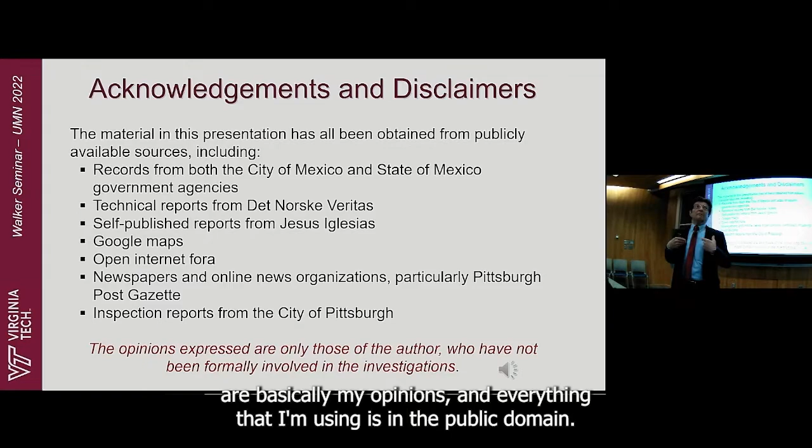Anyway, I'm going to talk a little bit about a topic of my interest, not really research in that sense, but a topic that I find very apropos. Before I start, I must put this disclaimer up there because everything you're going to hear are basically my opinions, and everything I'm using is in the public domain. But all the things I'm going to say are my responsibility.

So just to give you, for those of you who don't know me, I was a beautiful baby. And I've had the opportunity of moving around a lot and living in different places, and I think that's been terrific.

A recent shot of my family, my son and my daughter and my wife, and my son is married, and I have a beautiful daughter-in-law and a great granddaughter, and hopefully I'll be a grandfather again for a second time very soon. So things are changing for me.

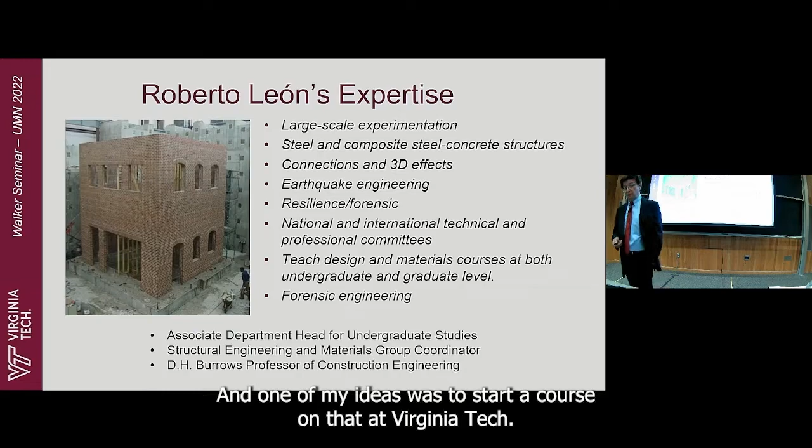Over my career, as Kathy says, I've done a lot of things, but the last thing that I got pretty interested in is forensic engineering. That's when I went to Virginia Tech, and one of my ideas was to start a course on that at Virginia Tech. And the origins of that are actually here in Minneapolis.

My first foray into forensic engineering was with the collapse of the formwork for the arch bridge that was replacing the old one on Hennepin Avenue. This was a pretty interesting situation because it was a failure of formwork, and I actually didn't participate in the investigation per se. If you're interested, there is a PCA report that's now online about the whole investigation.

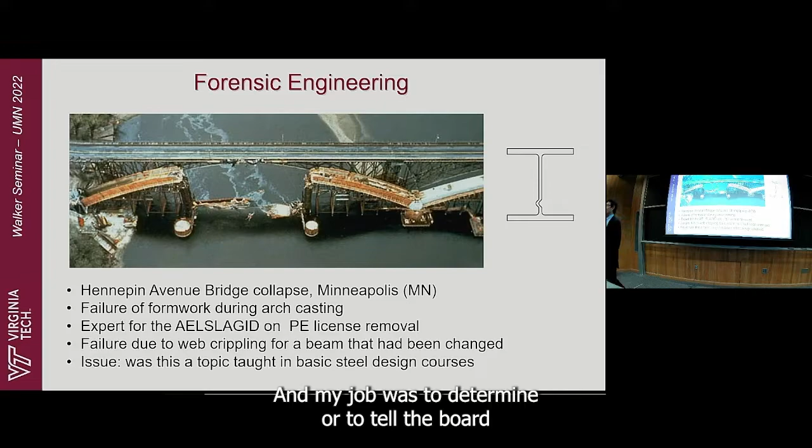I served as the expert for the Board of Licensing for engineers here to determine whether the license of the engineers for that part of the project should have been taken away. And the whole thing hinged on web crippling. My job was to determine, or to tell the board, whether web crippling was something that got taught and was important enough that the engineers should have known about it.

And I was a young, stupid assistant professor, and I said yes. And they actually took away the licenses for the engineers as a result of that. I think with my experience today, I would have handled that a little bit differently. But I've had lots of other experiences.

I was not, for example, involved directly on the I-35W bridge, but I was very involved with a colleague at Georgia Tech, Don White, in looking at both the analysis and the testing of full-scale truss connections. This is not a half-scale version of the one that collapsed, it's as close as you can get.

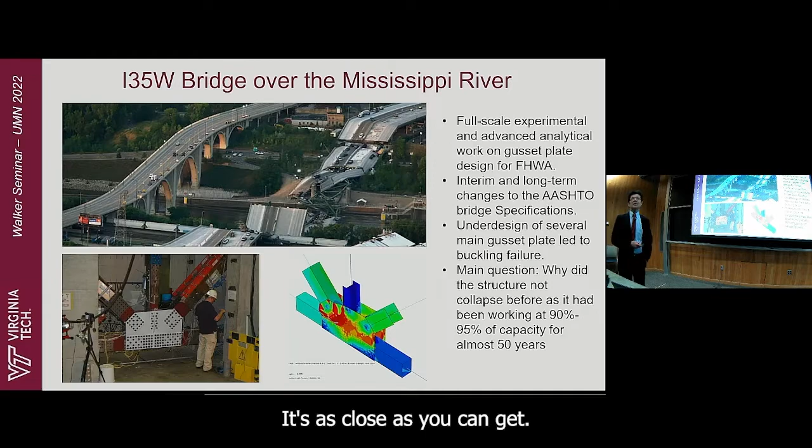I've also had the opportunity of doing a lot of research on seismic design and post-earthquake investigations. I happened to be in Christchurch, New Zealand, when the earthquake occurred back in 2011, and I was there for 3 months afterwards. So I saw how, in the longer term, a city reacts to a disaster like that.

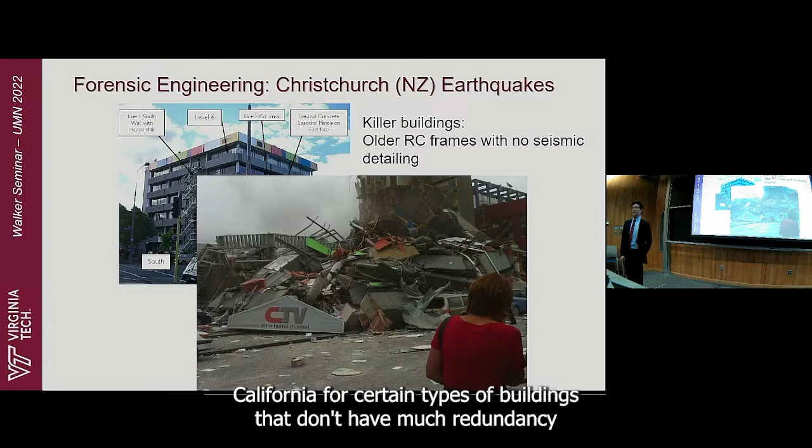I had been to other situations like that, but you usually go for a week or 10 days and then you disappear, and you kind of lose track of what's happening. So that was quite interesting because in this particular case, there were probably, I believe, around 160 casualties in this earthquake, and about 100 of them occurred in 2 buildings, what we call killer buildings. This is a terminology that's being used now in Southern California for certain types of buildings that don't have much redundancy or have certain pathologies that make them very susceptible to failures.

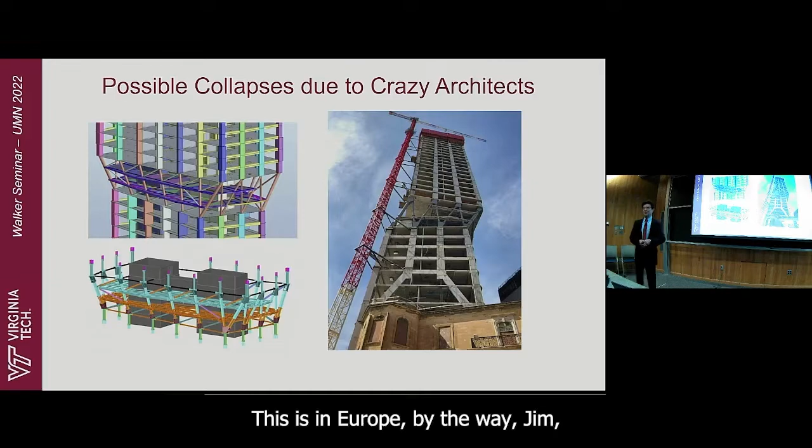Were meaningful enough, or if the piece as fabricated was fit for purpose. So I've done things like that, and then I also do things on my own, such as looking at buildings like this that you wonder who decided in a high seismic zone to do this kind of thing. This is in Europe, by the way, Jim, so that we wouldn't allow this in the US, hopefully, but you just wonder why people do that.

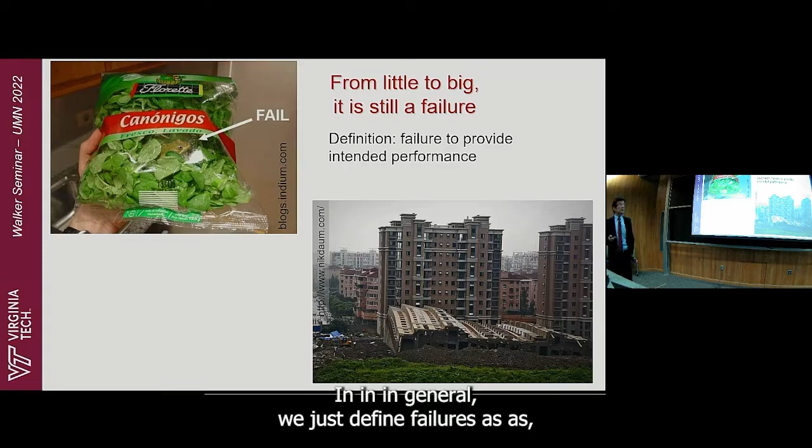So there are failures, right? And there are small failures, right? This is before lunch, so don't look at that. And there are big failures like that, right? In general, we just define failures as the failure to provide intended performance.

But if you look at the literature, there are lots of people, and many of you are probably familiar with Henry Petroski, who says it behooves us to beware of the lure of success and listen to the lessons of failure. So that's what I've been trying to do. And successes and failures are just part of our everyday life, right?

At almost every level, right? And so I think it's interesting to investigate that. And some fairly famous philosophers have looked at this, and I don't know how many of you are familiar with Immanuel Kant.

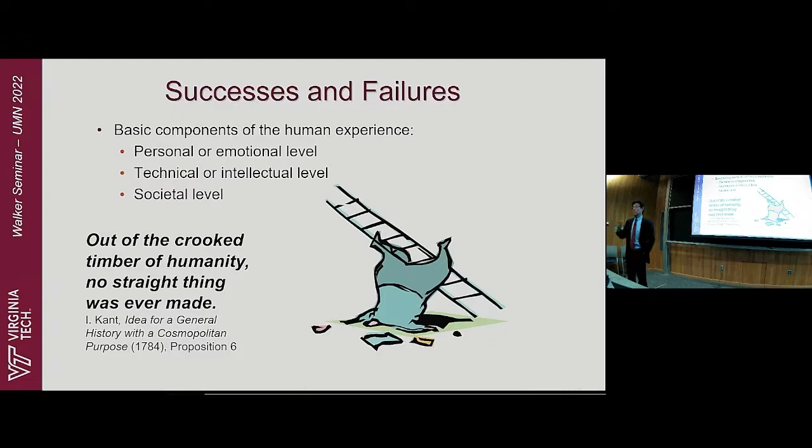This is proposition 6 out of - this is the question, there will be a quiz at the end. How many propositions are there, and which is number 9? Okay. But out of the crooked timber of humanity, no straight thing was ever made. And the idea here is that we really, we're going to have errors. We're going to have to learn from them. All right? And so that's where we are at.

And over the last few years, I've taken sort of a more sociological approach to this. And so there are a couple of people out there. I'll mention the first one is Kathleen Tierney, and she used to be a professor at the University of Colorado. And her hypothesis is that risks and disasters are produced by the social order itself, by governing bodies, organizations, groups that push for economic growth, oppose risk-reducing regulation, and escape responsibility for tremendous losses when they occur.

This is very different from what an engineer would think about. And so this is where I'm going with it. I strongly recommend, if you have not read it, her latest book is entitled Disasters, and it's a very easy read. If you have not looked at that, it'll be a nice book to read for you. Not really summer reading, but maybe winter reading.

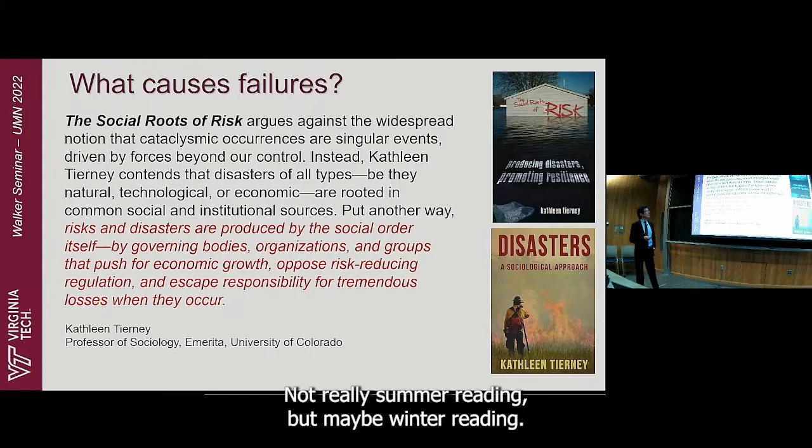But the issue is really that we are beginning to see sort of a different type of failure, what is called nowadays in the literature sometimes a Natech failure. And this is the confluence of a natural disaster and human intervention. And so Fukushima in Japan is an example of that, right? These are very low probability, but very high impact type situations, right?

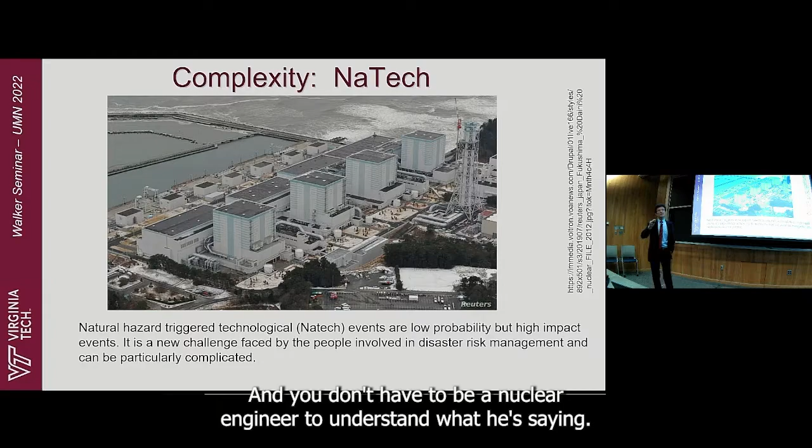And basically they're triggered by some event, but the human intervention makes them worse as we go along rather than better. And if you're interested in seeing or listening to a good example of that, out there in Coursera, there is a lecture from a professor of nuclear engineering at MIT that talks about the aftermath of Chernobyl. And you don't have to be a nuclear engineer to understand what he's saying. And he just goes step by step of how many human interventions led to the disaster that was Chernobyl, and how many times sort of the right human intervention could have, at least in that case, reduced the consequences.

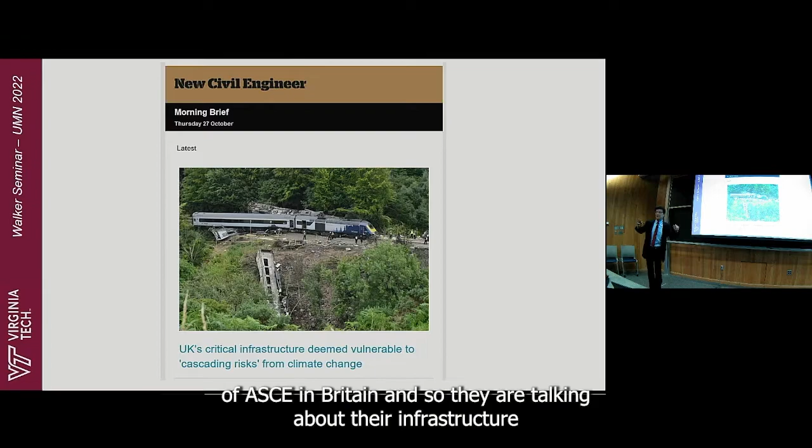And so these kinds of events are what we call cascading events, right? And so one thing leads to another, and somehow things just snowball. So this is a particular interest of mine. And you can find it almost everywhere. And so yesterday in the morning, I was just reading my email, and one of the things I get is the thing from the equivalent of ASCE in Britain. And so they are talking about their infrastructure and cascading risks from climate change.

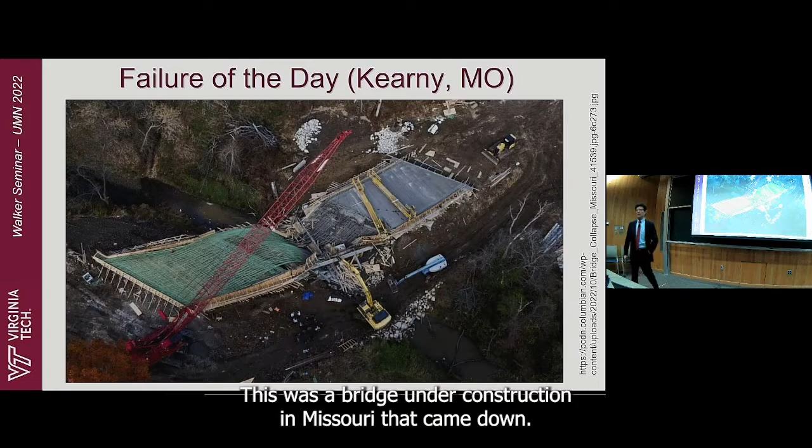I teach a class on failures, and I basically have a failure of the day picture. This is the one from yesterday. This was a bridge under construction in Missouri that came down. If you look at that bridge, it doesn't look like an unusual bridge at all. These things should not be happening, but they keep happening. Construction is by far the most dangerous of our industries.

With that as background, I'm going to talk about two events: one is the Mexico City Linea 12, and then the Pittsburgh Fern Hollow Bridge. I'm not sure if I'm going to get to very much of the second one because the stories are long, but my interest is in discussing and contrasting these two very different failures.

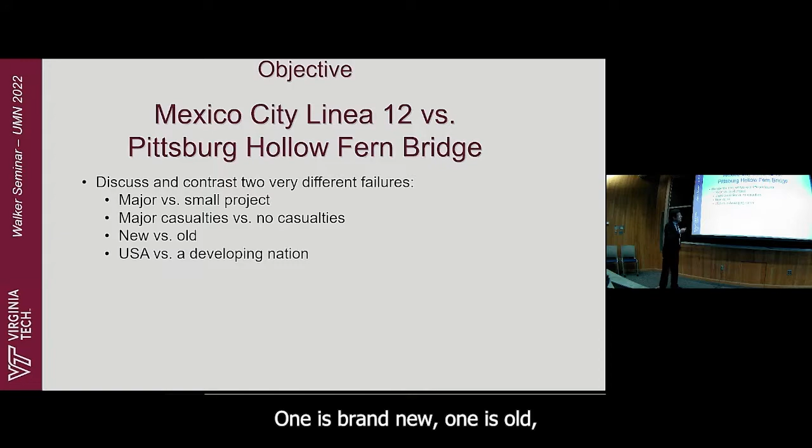One is what you would call a very large project. There were major casualties. One is brand new, one is old, one is in the US versus a developing nation. There are lots of things like that you can contrast, but there are lots of parallels, I think, because the issues are really whether there is engineering malpractice versus human error.

Human error is something that we will accept. Engineering malpractice is not something that I would. And then more interesting, and I'll try to weave this into the story, are the political forces that drive some of these issues. Getting back to another of the sociologists, Charles Perrow, who's a professor, or used to be a professor at Yale, he basically says that it's not that we are having more disasters nowadays, but because we have concentrated people, resources, and manufacturing in certain locations, the consequences are far larger than they used to be. And then whether we as the public are involved at all in some of these issues.

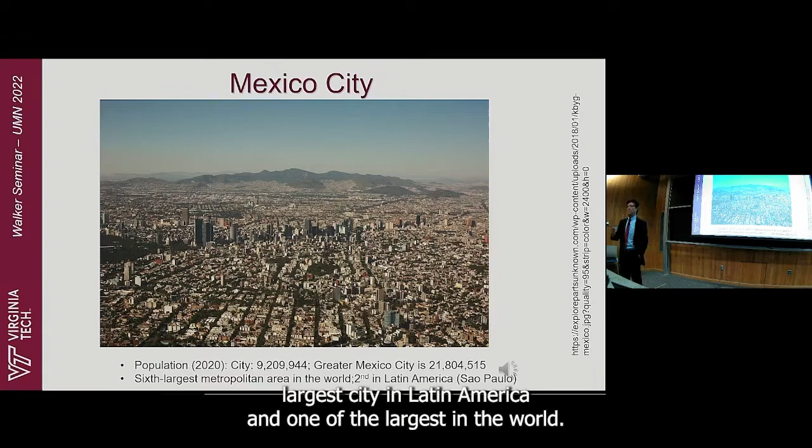So let me start with the Mexico City case. I owe a lot of the data here. We collaborated with a former student of mine, Tiziano Perea, who's a professor at the Universidad Autónoma Metropolitana in Mexico City. Mexico City, as you most probably know, is a huge city. It's the second largest city in Latin America and one of the largest in the world. It's sitting in a very particular geological setting.

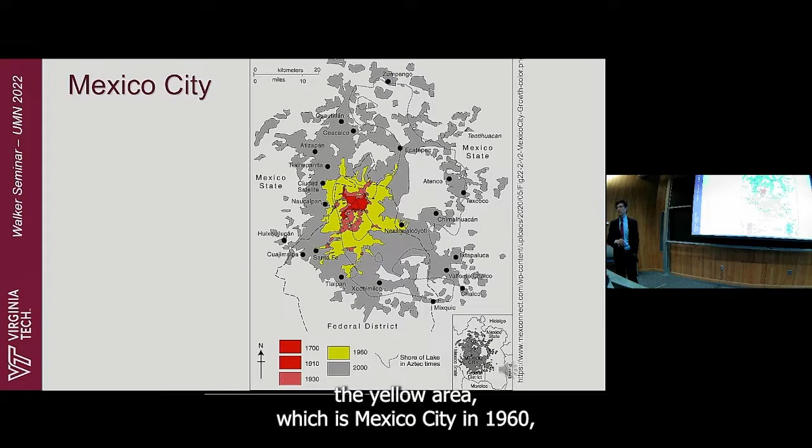Here is a diagram that shows the growth of Mexico City. I just want to point out the difference between the yellow area, which is Mexico City in 1960, versus Mexico City in gray today. An enormous explosive growth.

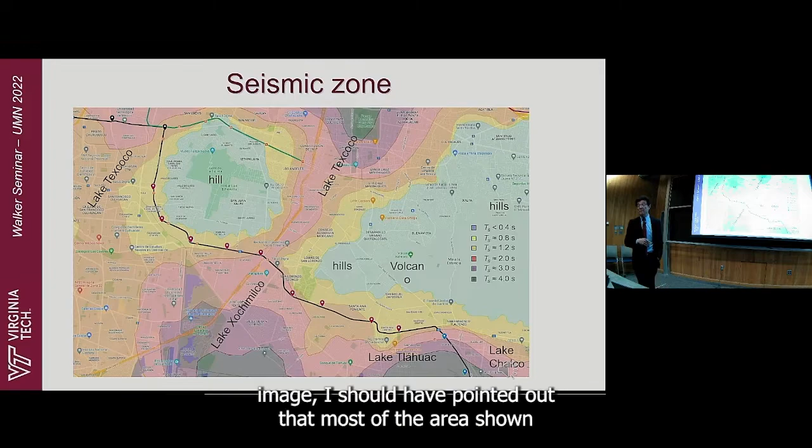In order to accommodate that, there has been a lot of construction of public transportation, but there was a little area down here at the corner where there was no metro. There were lots of studies about this, and in the early 2000s, the Mexico City government decided that they wanted to build a metro there. But in the previous image, I should have pointed out that most of the area shown is an old lake bed, so Mexico City sits on very soft soils.

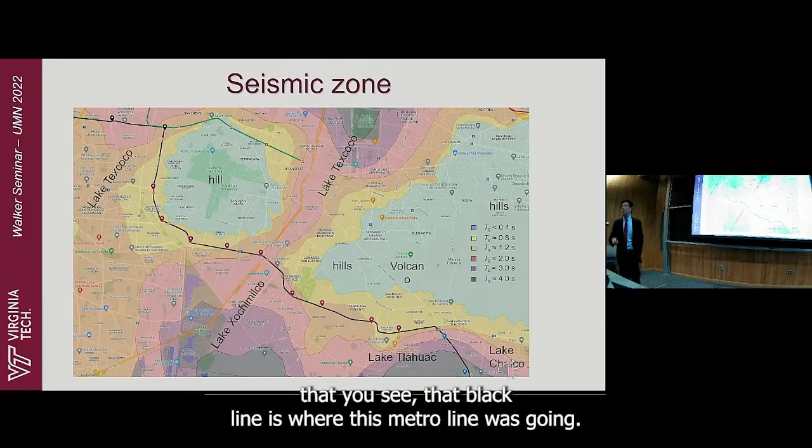So this is in case there was somebody from the geotechnical side, I had to show something about soils. These are the periods of the soils in Mexico City, and the black line you see is where this metro line was going. This was a very challenging situation because Mexico City sits on a very soft basin.

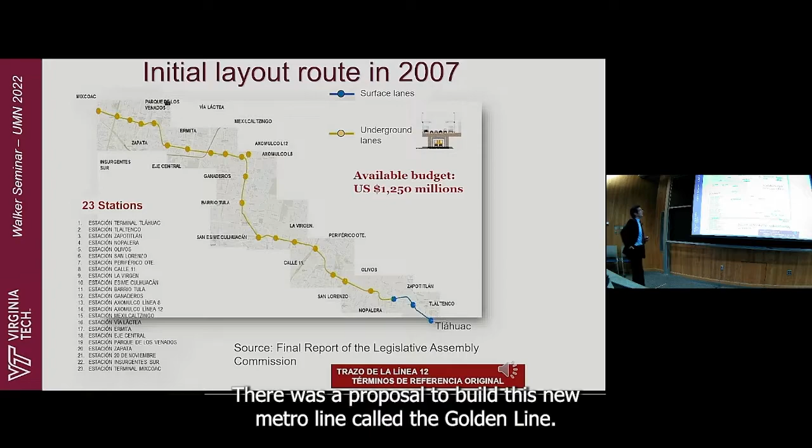So at the beginning of the 2000s, and actually this had been going on for about 15 years, there was a proposal to build this new metro line called the Golden Line. Initially the budgets were about $1.2 billion.

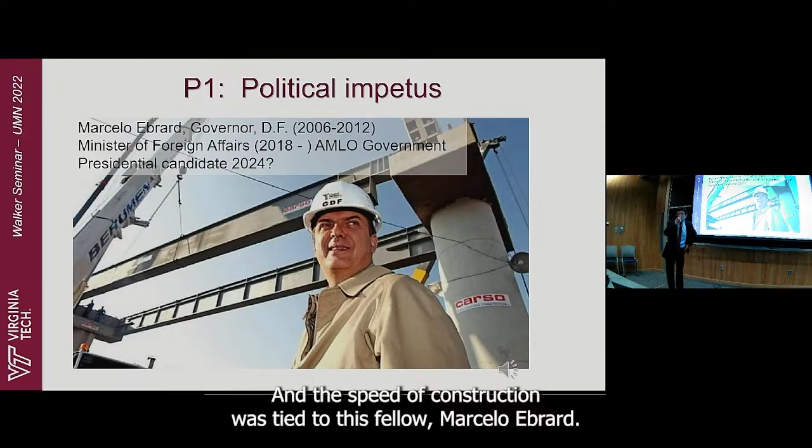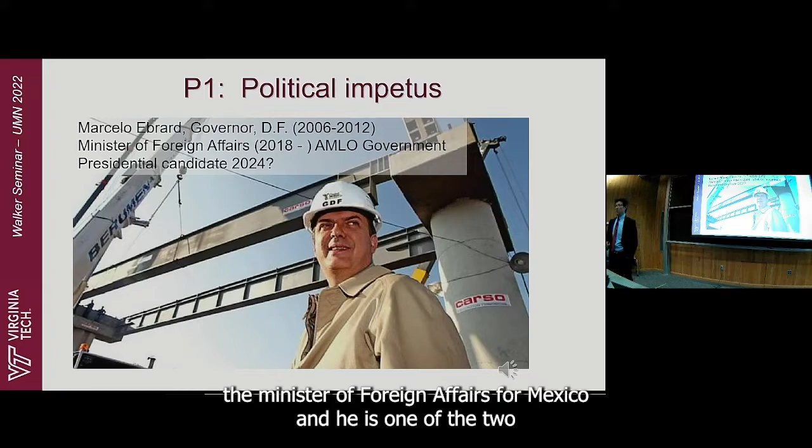And the speed of construction was tied to this fellow, Marcelo Ebrard. He was the governor of Mexico City, and being governor of Mexico City is like, Mexico City is almost a country unto itself. He is currently the Minister of Foreign Affairs for Mexico, and he is one of the two most likely candidates to be president of Mexico next time, after Mr...

López Obrador leaves. You can see him in this picture under one of the construction sites for the metro line. A couple of other things that I need to point out.

Anybody know what that name is, Carso? I'll come back to that in a little while. But the story is long and complicated, and I'm going to try to keep it relatively simple.

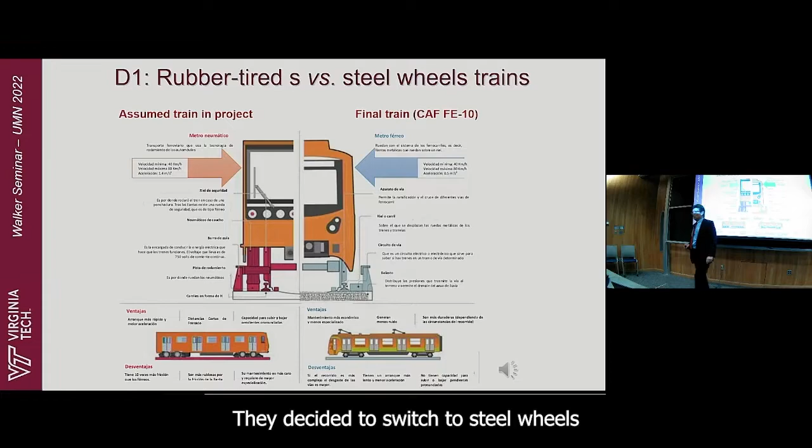There were lots of changes driven by political and what I would call economic interests. The major one: everything in Mexico City's very large metro system, which has been around for almost 50 years, is on rubber wheels. Guess what? They decided to switch to steel wheels, and they had very little experience with that.

The other thing is that because they wanted to hit all of these very populated places, they wanted to go on the roadways, on an elevated roadway. And that resulted in a lot of very sharp curves on this thing, which is not good if you're trying to put in a transportation system, because it considerably slows down things.

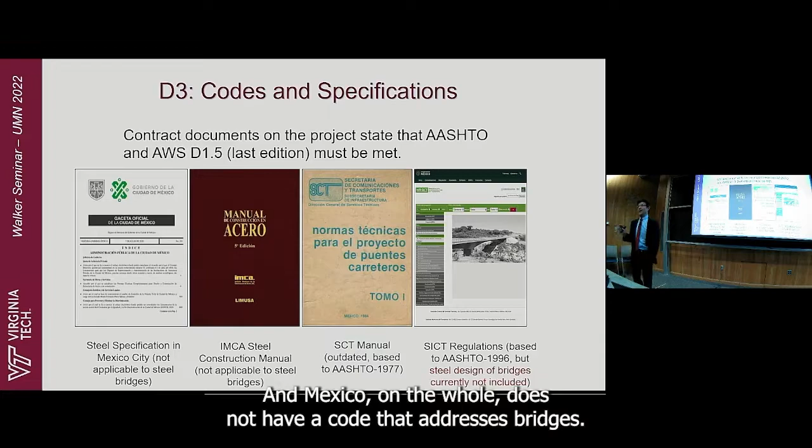The third interesting thing is that Mexico City does not have a code that addresses steel bridges. Mexico on the whole does not have a code that addresses bridges. They have it for buildings and so on, but they adopt AASHTO. So this project was supposed to be designed by AASHTO, and a lot of the things I'm going to say next relate to checks that one would have done against AASHTO.

The choice of steel was also driven by the fact that Mr. Ebrard only had about 5 years to finish this project because he cannot be reelected. He had to complete this in his term. Building it in concrete was going to take a little longer, so they decided to build it in steel.

There's very little experience in Mexico in building steel bridges. There are a few companies that do it and do it very well. The one that was chosen was the best firm that does buildings, and Ted actually knows the guy that runs that firm. So lots of issues came up.

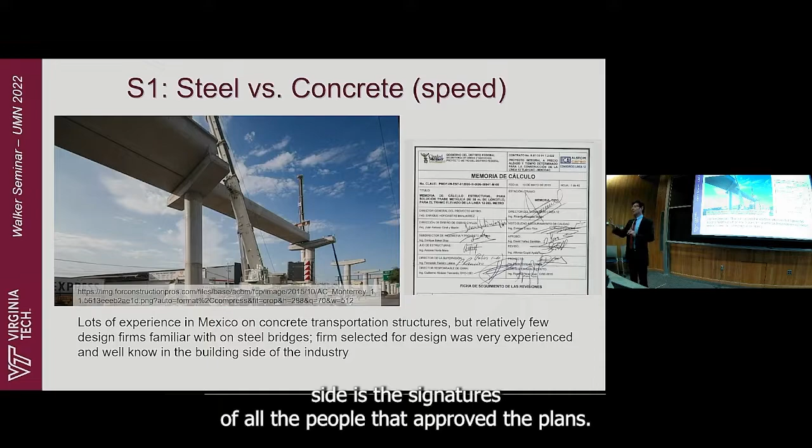We are able to trace all of them because on the right-hand side is the signatures of all the people that approved the plans. All the plans are public, and all the calculations are public, so you can actually go and read and check the calculations.

So here's the general layout of the project: a single concrete pylon, a concrete cap beam, and 2 steel girders on top. What you see at the top are the precast slabs that were being used for this. I'm going to come back to those in a minute.

Here is a cross-section of the main structural portions. I'm going to concentrate only on the steel and the concrete portions, because this is supposed to be a composite system.

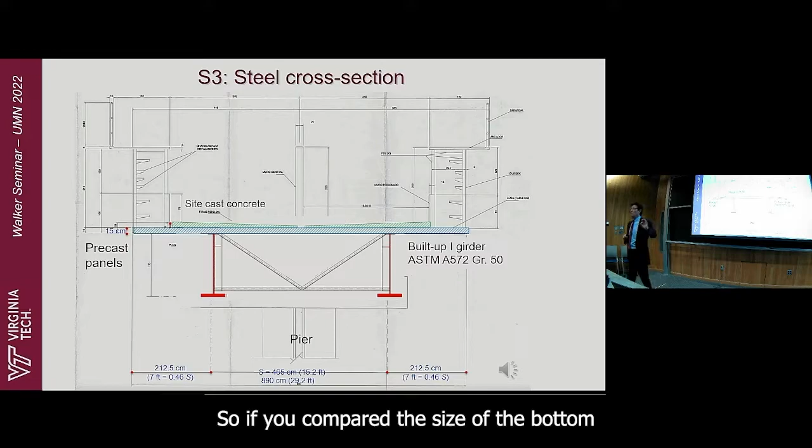The most interesting thing I have to tell you to begin with: if you look at the red outlines for the big steel girders, those are to scale. So if you compare the size of the bottom flange to the size of the top flange, you would immediately hopefully guess that there's something not right about that.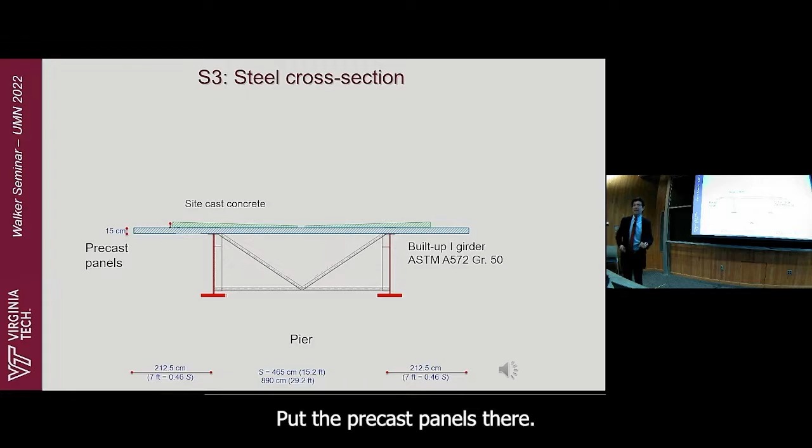The idea was to build these things and then come in with those precast panels I showed you, put the precast panels there. I don't know if you noticed, there were some holes on those precast panels—I'll come back to that. That's where they were going to weld the shear studs through, and then put a little finishing portion in concrete up here, cast in place, to make the whole thing work together.

That was the idea. There were lots of design changes because when you go from a rubber wheel to a steel wheel type of train, the ballast and everything else changes quite drastically. So there were lots of things that naturally kind of got lost in the process.

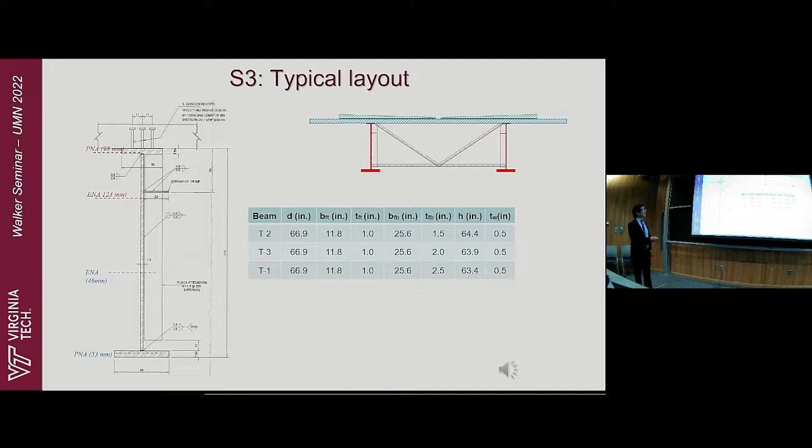But if you just look at this cross-section here—I was talking before about the fact that if you take the area of the top flange and the area of the web, hopefully that should be about half. You look at this beam: the area of the top flange, and the area of the web, is much less than the area down here. So if you look at what we call the plastic neutral axis of this girder, it's actually sitting in the bottom flange.

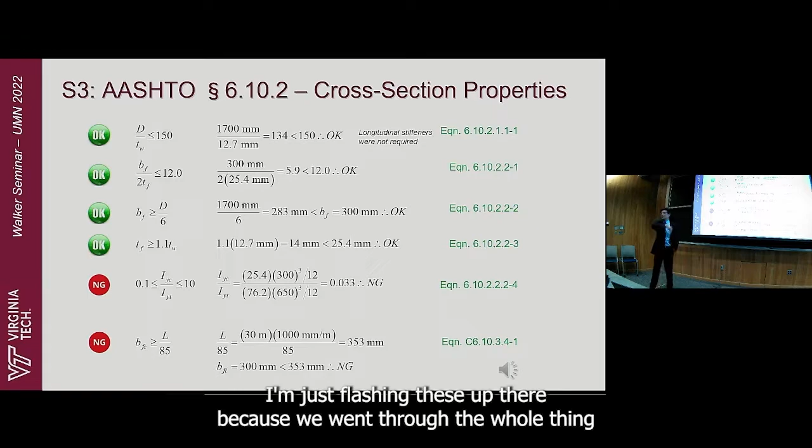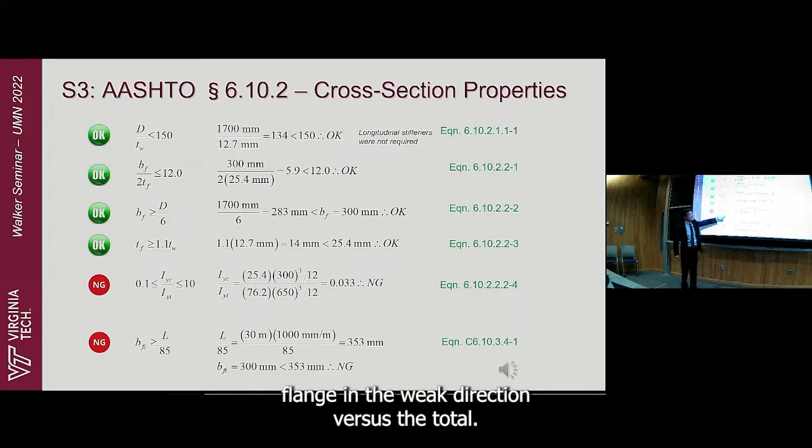This ain't right. If you go through the checks, these are some of the checks you have to do on the geometry of the girder by AASHTO, and there are at least two that are way off. For those of you interested in stability, this is the moment of inertia in the compression flange in the weak direction versus the tension flange, and this is way, way low.

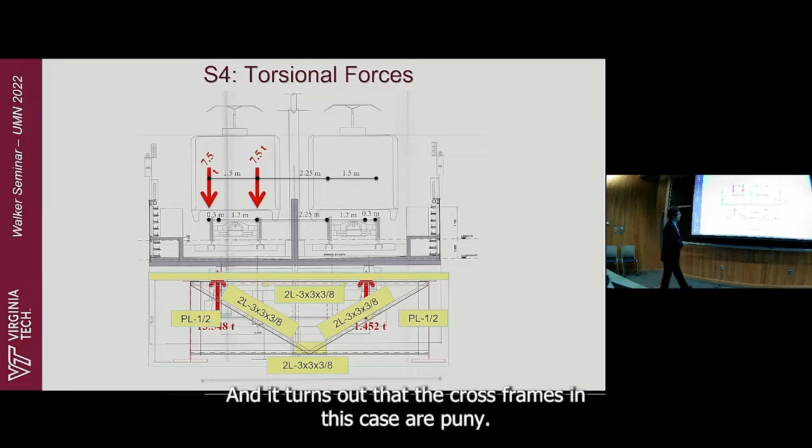The other thing that's interesting is, if you think about it, there are going to be large torsional forces on this. This is sitting on a single pylon. You've got two train lines, and the chances that you're going to have a balanced load are very small. There's always probably going to be a train on one side or the other. So you need to rely a lot on your cross frames to help the two things work together, and it turns out that the cross frames in this case are puny. They just won't work.

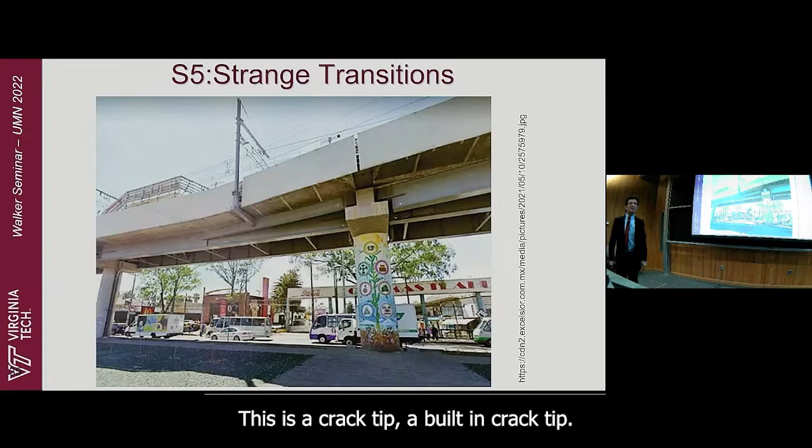Then there are other interesting things like this strange transition, and we're going to come back to this because this is where the failure occurred. This little beam here, what is it doing there? It comes to a point here and is welded. If you ever think of what is probably the worst stress concentration situation you can find, it's getting that thing—it's a crack tip, a built-in crack tip. There are lots of other things about the dapped ends of the beams there, but we'll skip those.

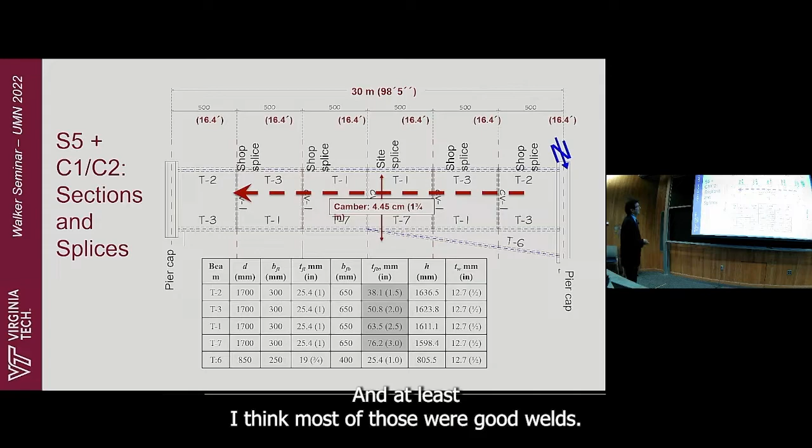Interestingly enough, if you look at that particular span I just showed you, everything looked kind of symmetrical. It turns out that's not the case, because they could only get steel plates in Mexico at a distance of 5 meters, and these are about 30-meter spans, so they needed to weld all of this in the shop. At least I think most of those were good welds. But if you look at the descriptions here, every section changes—there is not one section that's the same. Well, there are some that are the same, but there's also no symmetry whatsoever between the girders. It's a really strange design.

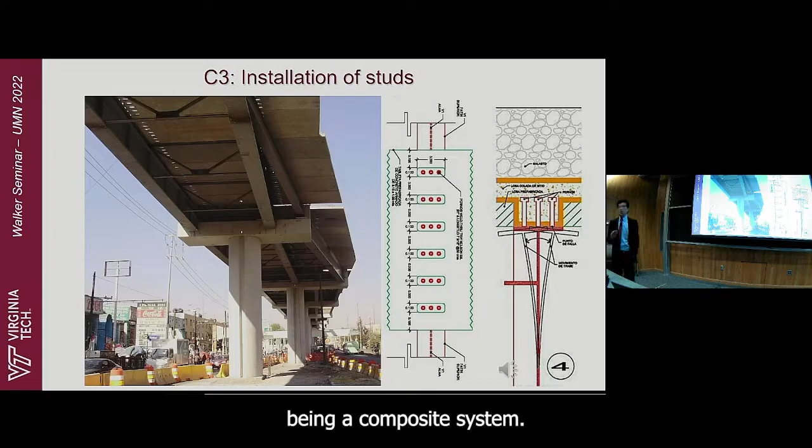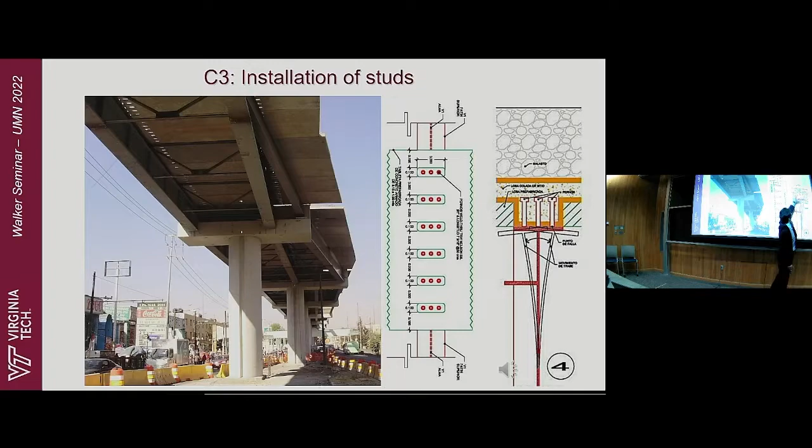The other thing was, of course, that this was going to rely on being a composite system. So once again, here's my little picture, and you can see the holes right there, and the elongated holes—those plates were moved over the girders, and they were going to come in and weld three studs into each of those. Now, if you think about construction tolerances, even the smallest of these tolerances in terms of the straightness of the girder means you're not going to hit that hole very well, and you're still trying to put those in there. So the idea was they were going to come in, do this, and cast some fresh concrete in there, and it was all going to act compositely.

So Mr. Ebrard was very successful—this thing got opened on time. And I'm going to show you, anybody recognize that guy?

His name is Carlos Slim. At the time, Carlos Slim was the richest man in the world. He's dropped—he's number 12 now because Elon Musk and people like that have taken over the top of the list. But he was the richest man in the world at the time. And you know what's the most surprising thing? What do you think his profession is?

So, if the only thing you take away from this is to tell your classes that you can really get rich being a civil engineer, here it is. He is the owner of the construction company that I mentioned before.

But you can understand here what I'm trying to show, very quickly, because this is a very complicated web of interactions—giving you some thought about how all the politics and the technical things just kind of got together. And so immediately, within about less than a year and a half from the opening of the new line, it had to be shut down, and shut down for quite a while, because all the rails were cracking.

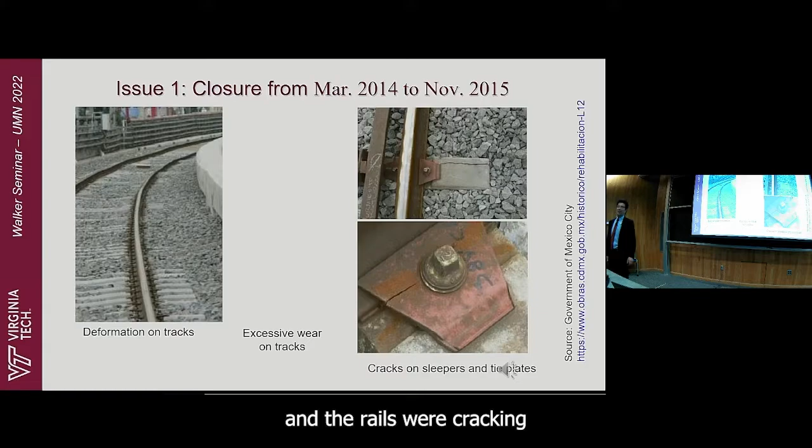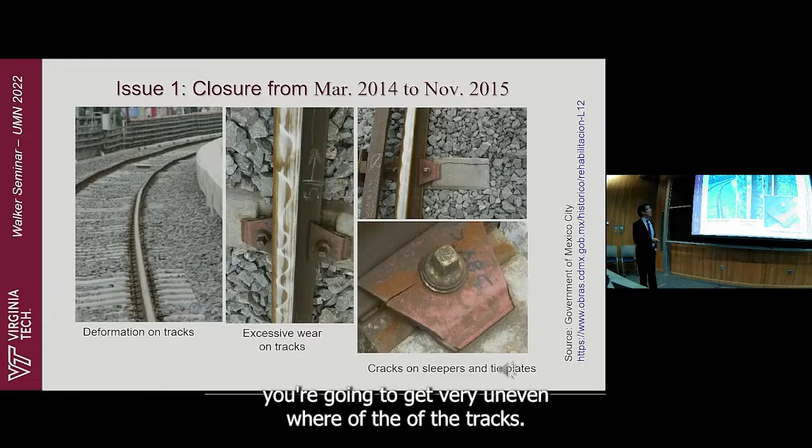And the rails were cracking because the turns were too sharp, number one, and there had been problems because when they changed the design from rubber tires to steel tires, they hadn't accounted for the fact that if you go on very tight radiuses, you're going to get very uneven wear of the tracks. Here are a couple of pictures—you see on one side, the wheel is bearing; on the other side, not even close. So these are construction tolerance issues.

This meant that the entire project ended up almost, in terms of the tracks, being rebuilt from scratch. So almost immediately after it opened, within about 16 months, it was closed for about a year and a half.

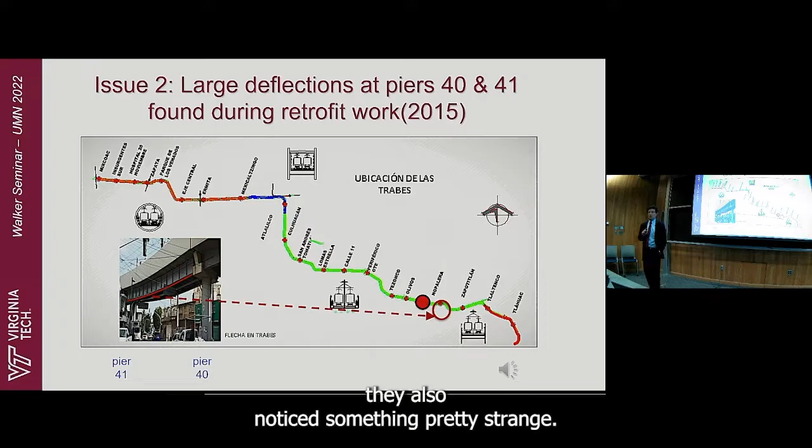When this happened, they also noticed something pretty strange. There was one particular overpass section where they had large deflections. And when I say large, they're large—you can see them here.

There was web lateral buckling and web local yielding, all kinds of things going on, plus a fairly large lateral deflection on the whole thing. This is 39 centimeters on 35.6 meters, which is less than about L over 80 of deflection. And nobody asked the question at that time: why did that happen?

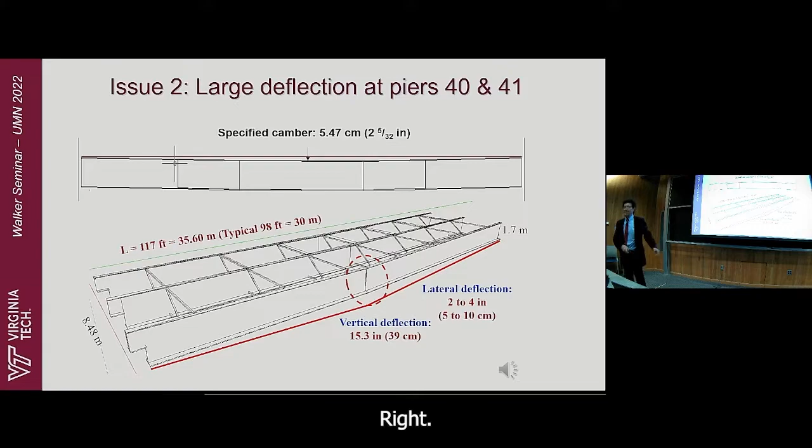What they did, of course, is immediately shore it, jack it up, and build this to support the structure. Now look at this—I'm going to show you a very similar picture of the fix they're doing.

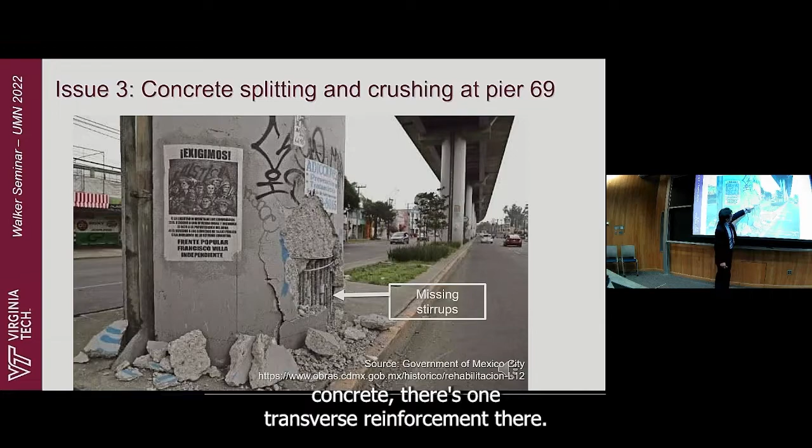Next comes a fairly major earthquake nearby in Puebla, and there are problems with the concrete. We don't know how well they were inspected. This is the only one that failed, but for those into reinforced concrete, there is one transverse reinforcement there—and where's the next one? Nowhere. So this just basically exploded.

Theoretically, there were only 3 of these that got fixed, and they got fixed by covering them with FRP. In the end, it looks pretty, it looks just fine. But we don't know how many are actually potentially susceptible to the same type of damage. This is a good picture to look at the bracing—that's not hefty bracing at all. It's not what you would see in a typical bridge in the US.

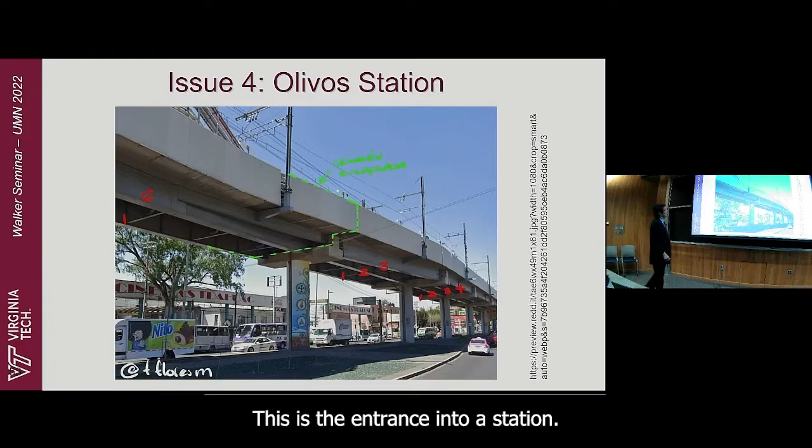And so the last part here is the Olivos station. This is where the failure occurred, this is the entrance into a station. Remember that little transition area there? Kind of weird.

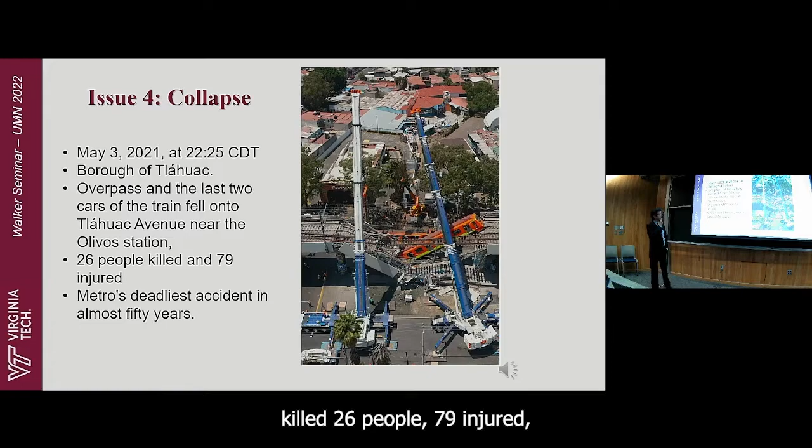Last year, about 18 months ago, late in the evening, when a train was going over the entrance to that station, that span collapsed, killed 26 people, 79 injured—a complete disaster.

Obviously, after the initial response, which was quite chaotic, you can see there are plenty of rescuers there, but what can you do about a situation where everything is in a stage of perhaps imminent collapse? It's difficult to deal with that.

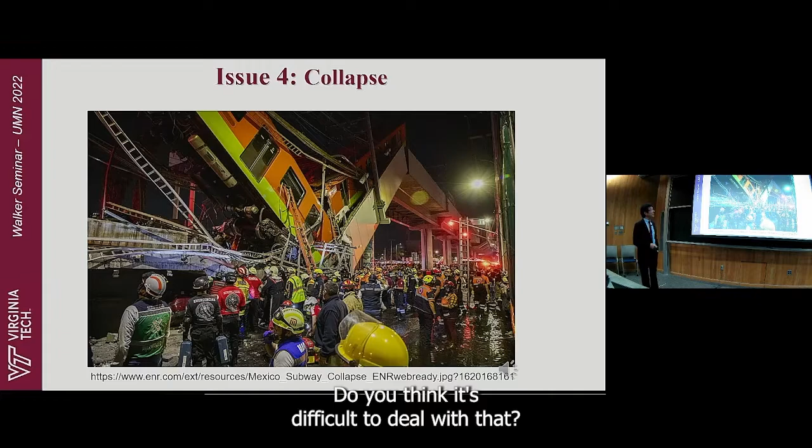But when people started to talk about this, immediately people got into social media and said, yeah, but we have been saying that particular location had a lot of vibrations as the trains went by. One of the great things in forensic investigations nowadays is Google and Google Maps—you can go and find anything there. So this is an image we pulled out of Google from that location several weeks before.

All you have to do is trace a line there and notice that thing is sagging quite considerably. And in fact, in the aftermath, there are pictures from the inspection reports, of which there were precious few, that clearly show that. Not only that, but perhaps more interesting to me is that 3-degree lean over on the side. Now, 3 degrees might not seem like a lot to you, but it's a lot if you think about it. So this structure gave signs that it was about to fail, but we never listened to the signs.

Next, an interesting political item: who did they hire to investigate this? They hired DNV, Det Norske Veritas, a Norwegian company, very well known on the offshore side of things, not in bridges at all. Why did they get hired? Because they work with Pemex—the Mexican petroleum company has a lot of offshore plants, so they knew them and were hired to do this. And they did a creditable job.

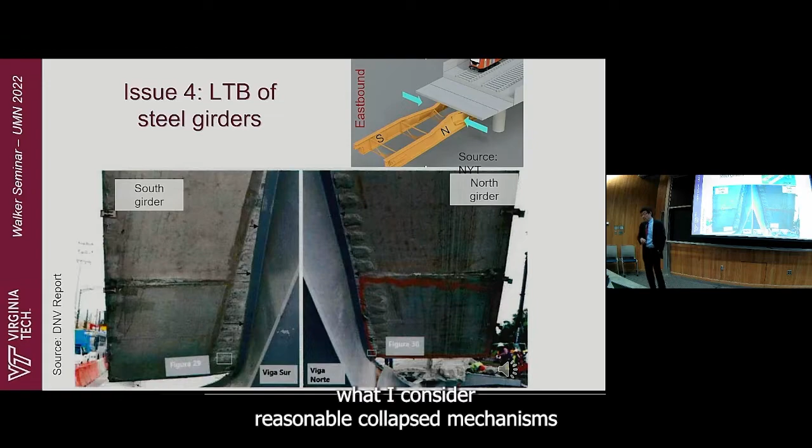They came out with 2 reports and came up with some reasonable collapse mechanisms, primarily a lateral torsional buckling of the beams. Because when you looked—these are the 2 beams just sitting on the ground—what you can see here are all the shear studs. This is where the beam was.

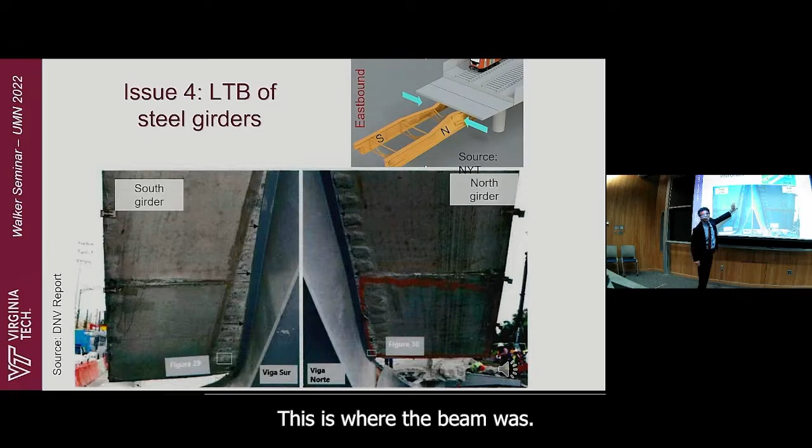When you go and look at the shear studs, these were supposed to be equally spaced—nowhere near. In this location there were supposed to be 3, as everywhere else. There are 2. And so, I'm not going to bother you with the checks, but clearly it failed—it failed strength-wise.

Before we even consider fatigue, which is what probably governs here. Here are a couple of shots of places where they took out the concrete to look at the shear studs. On the left-hand side, like this one, it's just hanging off the edge there. How well can you count on that?

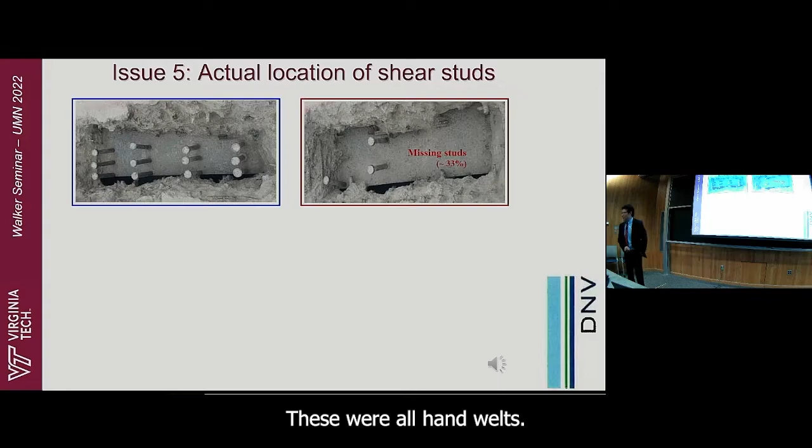On the other side, they're missing. For those of you familiar with this in the US, these are Nelson studs, and we have this gun that you use to do a really good weld. These were all hand welds. Here is one of the welds, a cross-section through the weld, showing incomplete fusion, lots of porosities, and things like that.

In fact, they extracted one of these studs, and the test, at least theoretically, in the United States, is that we should be able to pull that stud and get to the full capacity of the stud. Some of these failed at between 15% and 18% of their capacity. So there was not a lot of interaction there.

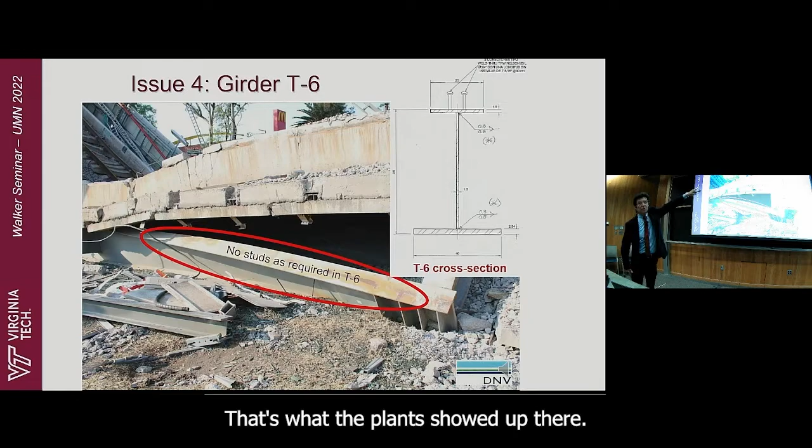In that key other little transition beam, that's what the plans showed up there. Where are the studs? They're nowhere. And so, Jerry, this is for you.

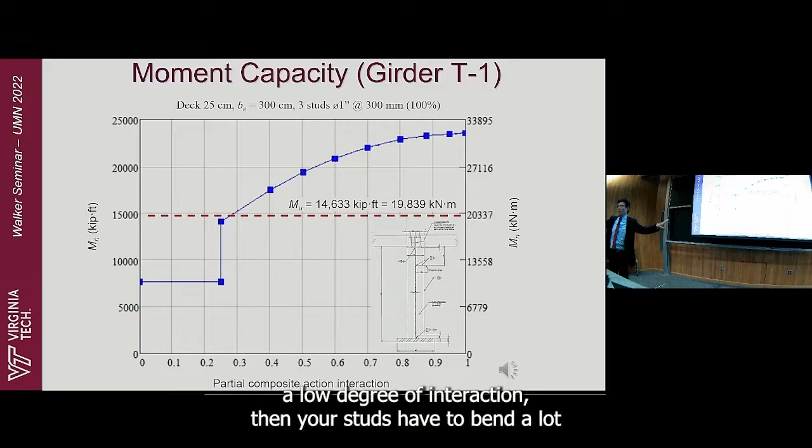This is the interaction we have in terms of the capacity of the system versus the degree of composite action. One of the things we've been talking about in AISC is that if you have a low degree of interaction, then your studs have to bend a lot, and therefore they have to be very ductile. And if you get to very low amounts of interaction, they just break. This curve does not continue like that, and this is exactly where we were with this particular thing.

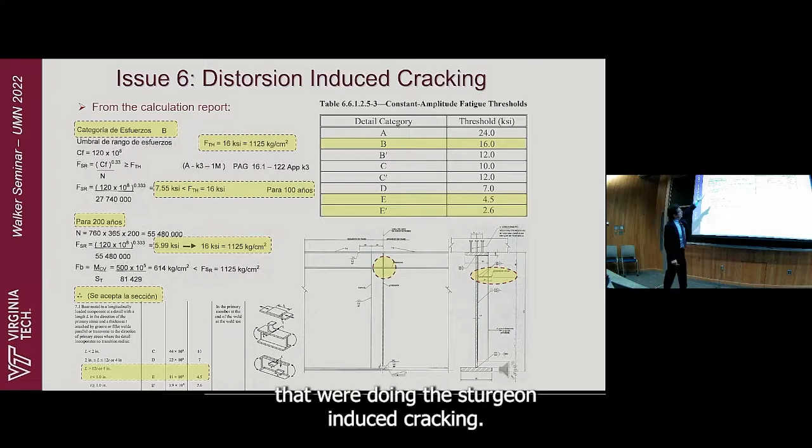Now, these are quick calculations, not necessarily exact. Last item to talk about: all kinds of weld details, details to avoid conditions susceptible to constraint-induced fracture. These are the tables from AASHTO. These are the designs, and they matched almost perfectly. They were doing distortion-induced cracking, again related to the out-of-plane motion of the structure.

Everything failed here. Last thing is, I mentioned there were two technical reports. The last one was due at the beginning of this year, and that was the third technical report.

Ms. Claudia Sheinbaum is the new mayor of Mexico City. She is the other contender to be president of Mexico. The previous two reports basically looked at the design and the construction, done under the previous administration by Ebrard. She was very happy with those.

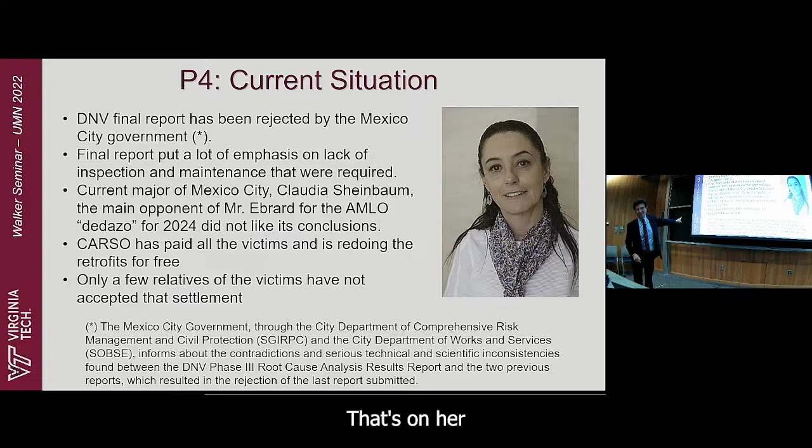The third report, which Det Norske Veritas called the root cause report, blames maintenance and lack of inspection. That's on her, or on her underlings. So they basically just rejected the report, and the situation is in limbo right now as to what the final outcome will be.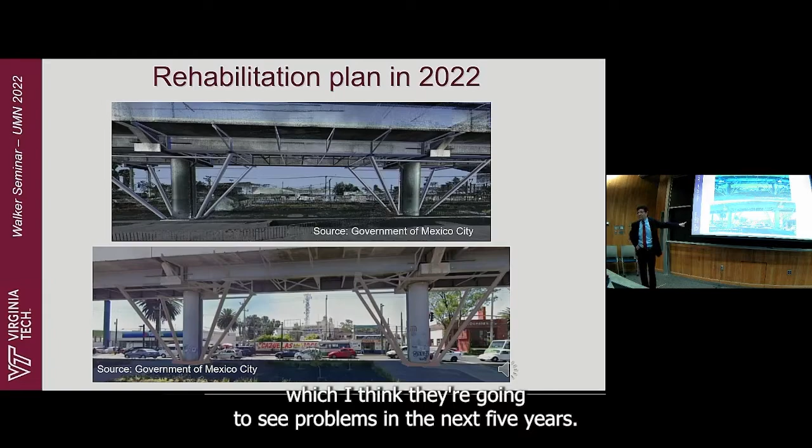Mr. Slim has paid, or will pay, for the entire fixing of this thing at no cost to anybody, and he has paid all the victims. We are not going to learn very much more about that. Miles and miles of this are being fixed like that, which I think will cause problems in the next five years. But that's the quick fix.

So, how am I doing with time? You have about five. Okay, very quickly.

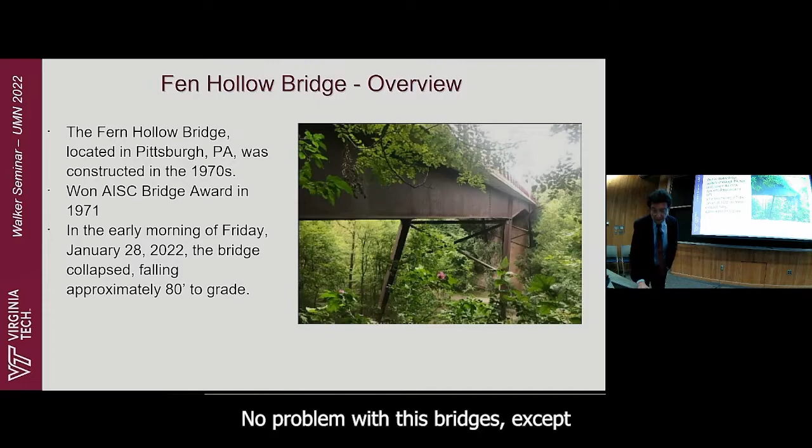So I just wanted to talk about what happens in the US, and is it that different? This is Fern Hollow, a bridge in Pittsburgh. Very nice bridge—AISC actually gave it an award back in '71 when it was constructed. It's a K-frame bridge; there are lots and lots of them around the country. No problem with these bridges, except if you don't take good care of them.

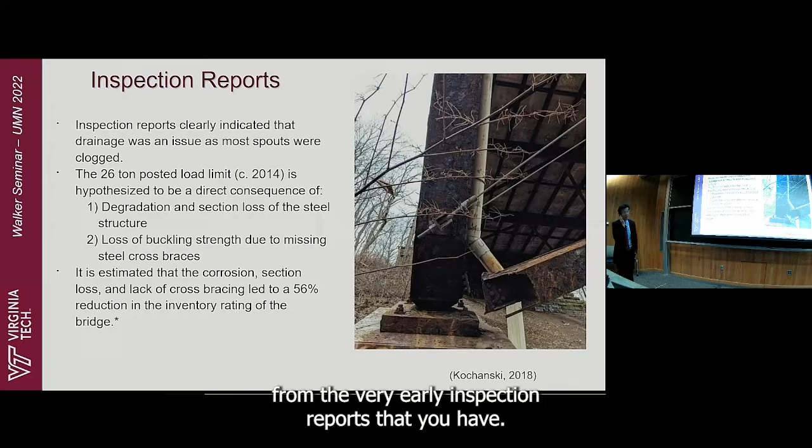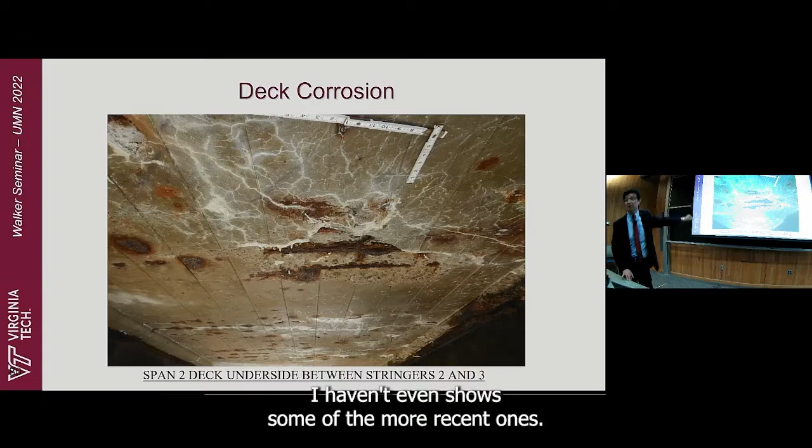So here you have a spout that should be bringing the water away from the steel. That's not the case. You see this little piece here? That's the brace at the bottom of that. This bridge was in terrible condition, and these pictures are from back in 2008 to 2012. I haven't even shown some of the more recent ones. There were parts where the bridge was gone.

But the more interesting thing here, for those of us who delve into stability, is that as this began to corrode, they decided they were going to come back and fix it by putting cables. You notice there are two X braces there, and the cables go from top to bottom.

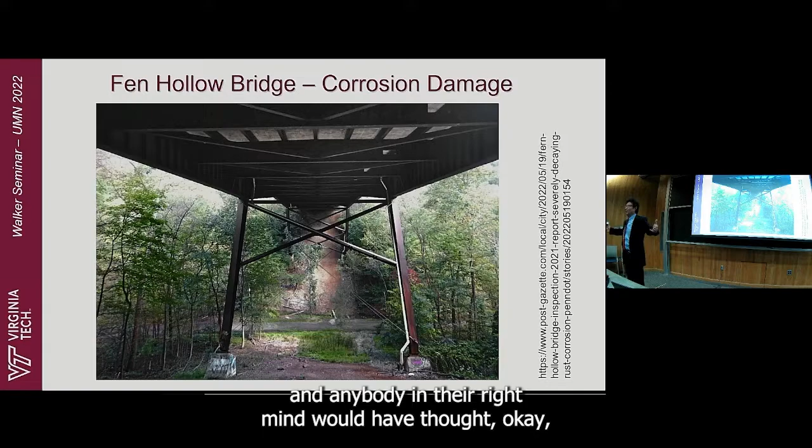Now, this is the good side. That was the bad side. This was fixed in 2011 or 12. Okay? And anybody in their right mind would have thought, okay, the cables are a temporary measure while we finish this, or while we do a real repair. No. And so effectively, what we went from is something that looked like this, my little frame on the left, to the one on the right.

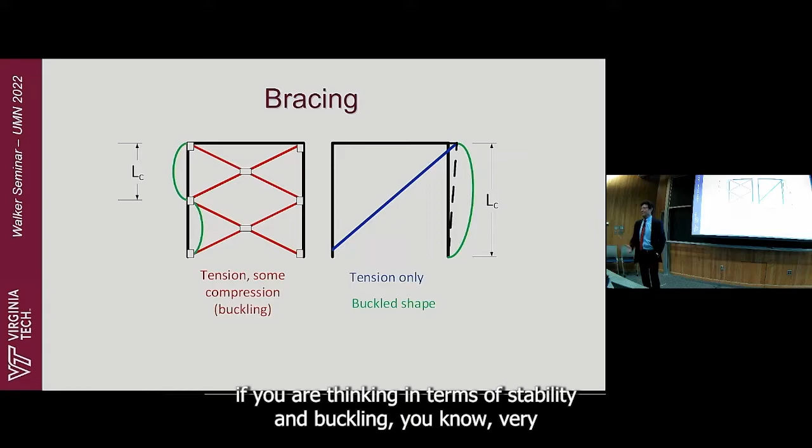Now, I don't know if this is what caused the failure. Because obviously, if you're thinking in terms of stability and buckling, very simplistically, you're increasing the length. But the bridge came down, and so there is a little bit of lateral movement there, but I can't quite tell if that's what happened.

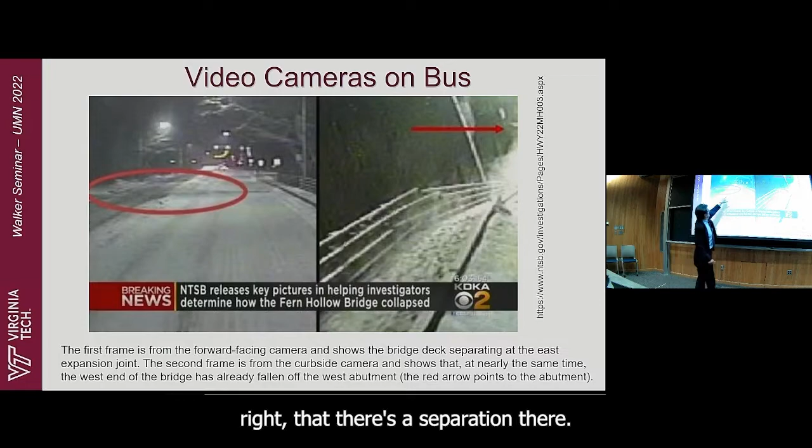Actually, very interesting because NTSB is doing the research, but one of the things that's most interesting for me in terms of forensic engineering is that now we have cameras everywhere. So this is the camera on the bus that you just saw. And this is the camera facing forward, and this is the curbside camera. And that bus is going down, almost as we speak. But you can sort of tell a little bit that there's a separation there, and this is actually moving a little bit sideways, probably. So much more investigation is needed on that.

I actually think that the failure occurred because of corrosion in the splices — I don't have time to go into it. There's a lot of evidence in some of the reports that corrosion was between 50 and 90% through some of those bolts. And nothing had been done.

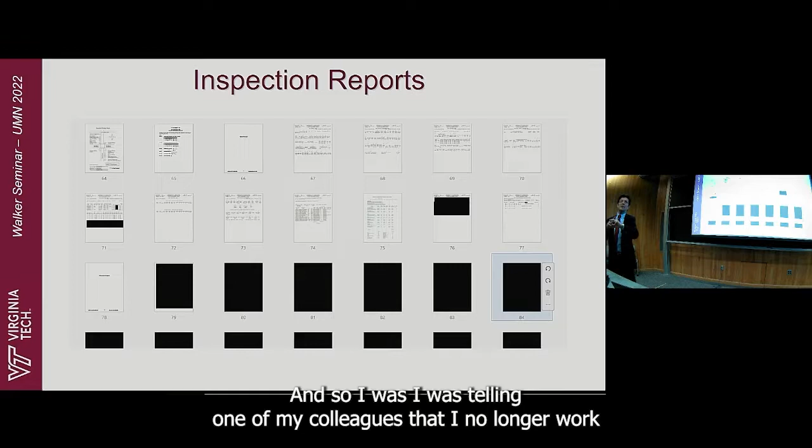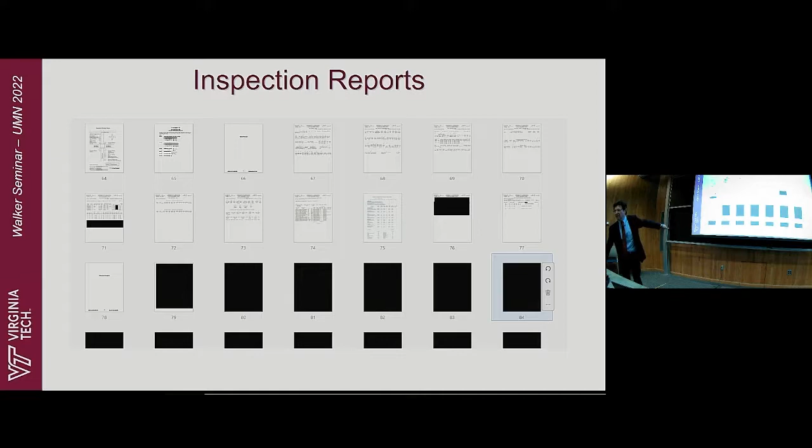We wanted to get the calculations. I was telling one of my colleagues that I no longer work for consultants, I work for newspapers, and I work for free for newspapers. So through the Freedom of Information Act, with a journalist at the Pittsburgh Post-Gazette, we tried to get all the reports. And they did, except all the interesting parts are blacked out. We asked why, and they said national security. We said, what? And they said, yeah, somebody could try to blow up that bridge. We said, that bridge is down. I thought that was a very powerful logic. It did not get us anything from the city of Pittsburgh.

And the other thing is, just like in the case of Mexico City — and I'm not going to talk about Minnesota and the I-35W bridge — what happens in the aftermath of something like that? You get it rebuilt as soon as possible so people don't complain. And so that's where they're at.

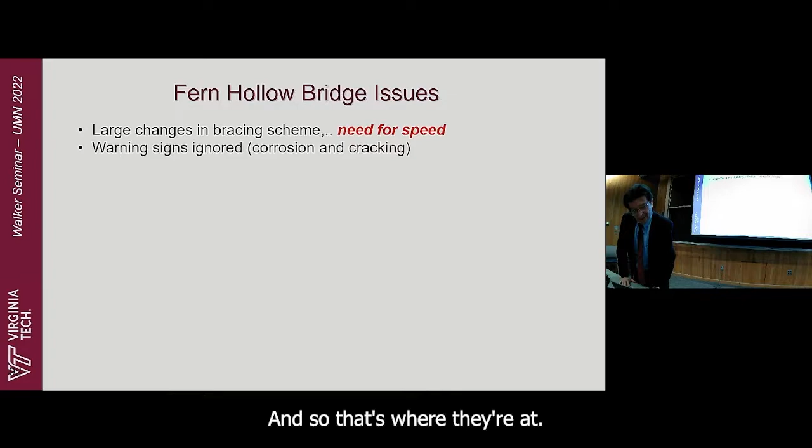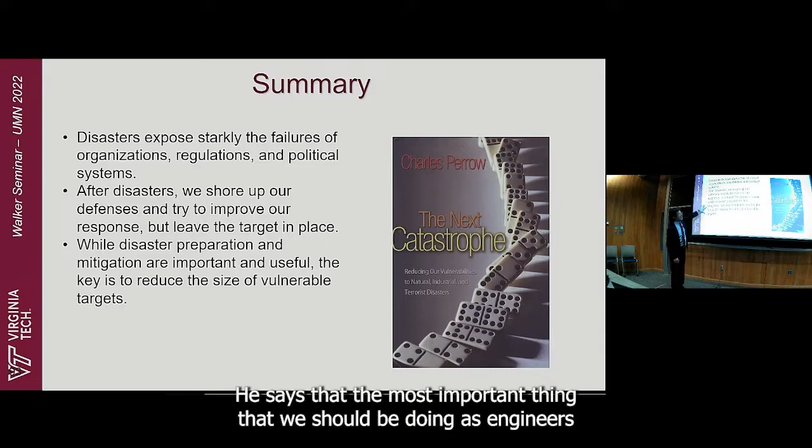So I'm going to end my story there with just a couple of things. Going back to my overall thesis, here's another book, if you're interested: The Next Catastrophe, by Charles Perrow. He has written a lot on failures from the sociology side over time. His point, going back to this idea that we are concentrating resources and population, is that the most important thing we should be doing as engineers is reducing the size of vulnerable targets. We need to separate things.

One last issue: what are we doing about it from the standpoint of the profession? When I was president of SEI, we went to England and talked to our colleagues at the Institution of Structural Engineers, and they have what they call the CROSS system, a system in which you can document failures anonymously. The problem we have in the United States is that everything ends up in litigation, and almost every litigation ends up in some sort of settlement, so we never find out the technical details of what actually happened, because everything is sealed. This is our answer to that, being pioneered by Glenn Bell, past president of SEI and principal at SGH in Boston, who you probably know quite well. And so that's the end of my story, and thank you for putting up with me.

Thank you for a wonderful presentation.

The question that I have is that it seems there are a lot of red flags all over the place. But is there a way of just bringing them up without people blowing it off, like it's not important?

Yeah, so the idea here is that even the workers, the construction workers, should be the ones that have a voice, a big voice in all of this, because it's their safety that is at stake. They are the ones who suffer directly in many ways. To me, the idea is that we need a much less fragmented industry in which people communicate a lot better.

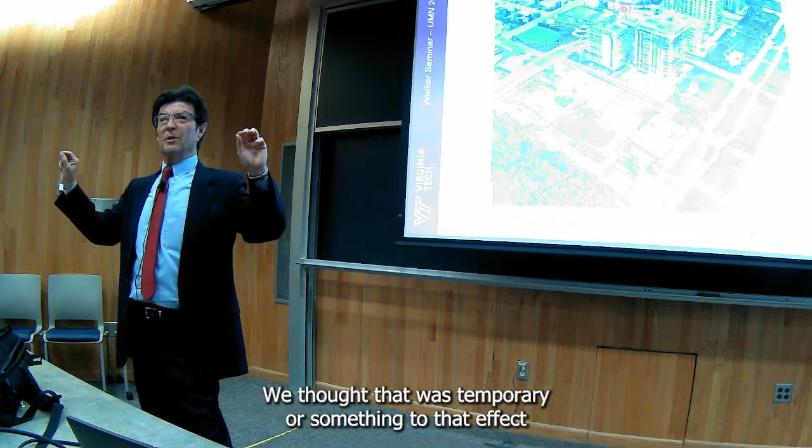I think, for example, for the Fern Hollow Bridge, I've read all the reports, and when I talked to journalists in Pittsburgh, I said I found sort of the smoking gun in a report from 2013, I believe, where the inspectors actually said the cables are still there, we thought that was temporary or something to that effect. And it's the only place where anything like that appears.

It is really strange, because you look at the pictures from inspection reports over many years, and you would say something needed to be done, somebody had to look at this. So I think my point there is that I was sort of being hard on Mexico, but these things happen everywhere.

Any other questions? Thanks for a great talk.

So I'm not a structural engineer. Are there no requirements to do something about these inspection reports? I wonder why they even bother to inspect if there's never any required follow-up.

So there is required follow-up, because due to the collapses of bridges, particularly the Point Pleasant Bridge in 1967, we have this requirement from the federal government that bridges need to be inspected every 2 years. But the question is what happens to those inspection reports.

This is the city of Pittsburgh, which probably has the most bridges in the country, so you have to be conscious of that. They also probably don't have a lot of bridge inspectors. And the best thing we were told is that this report, the last one, was probably sitting in a stack of things in somebody's desk.